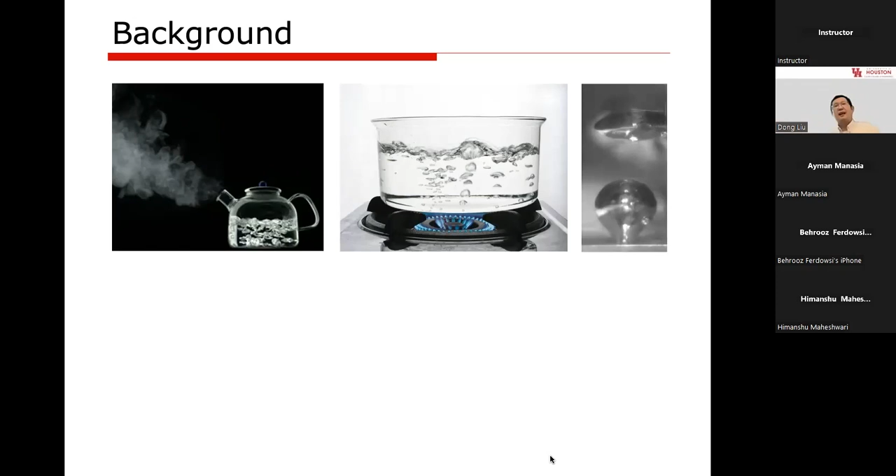So now, why do we study this? Boiling is good - specifically here I talk about so-called nucleate boiling, or nucleate pool boiling. This is when you have a pool of liquid at rest, so there's no flow in the liquid. Nucleate boiling occurs in such a scenario.

Now, if you have ever taken an undergrad heat transfer class, there are 3 modes of heat transfer: conduction, convection, radiation. Phase change is a different type, and in fact, depending on the context, nucleate boiling can be one of the more efficient heat transfer modes - even better than the other modes I mentioned.

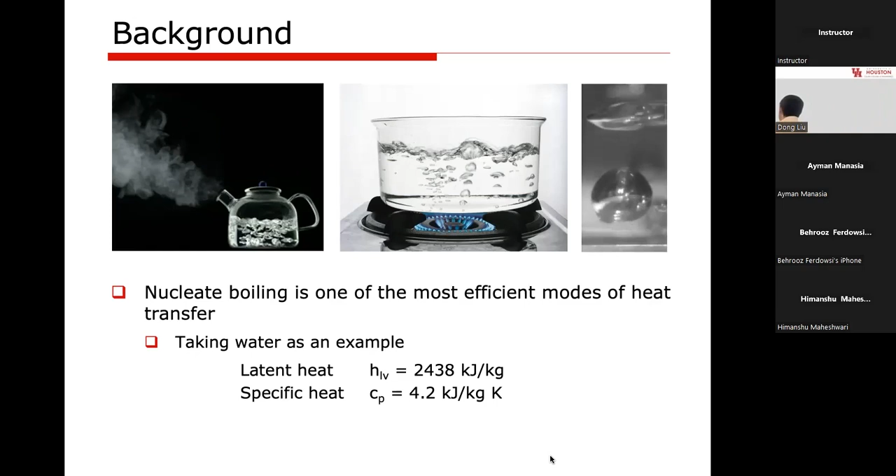So why? To give you a simple example, let's look at water. Water has two very important properties. One is its specific latent heat, which is 2,438 kilojoules per kilogram. This means in order to boil 1 kilogram of water, it can absorb this amount of energy - 2,438 kilojoules per kilogram.

Now, if you keep water as a liquid and only rely on the so-called specific heat to absorb energy, the CP is 4.2 kilojoules per kilogram per Kelvin. That means if you have 1 kilogram of water and you raise its temperature by 1 degree or 1 Kelvin, it can only absorb 4.2 kilojoules.

So now you see there's a big difference between using sensible heat versus latent heat. From this calculation, let's say we want to dissipate or absorb the same amount of heat with the same amount of liquid or water. If you rely on the boiling process, this is the amount of energy you can dissipate. Now this is the amount of energy you can dissipate by using specific sensible heat.

Now from fundamental thermodynamics, we know phase change can occur at constant pressure and constant temperature, meaning at 1 atmospheric pressure the boiling point will be 100 degrees for water. So while maintaining that temperature, you can dissipate this amount of energy. Now if you want to do the same using sensible heat, the water temperature rise must be as large as 600 degrees in order to do the same.

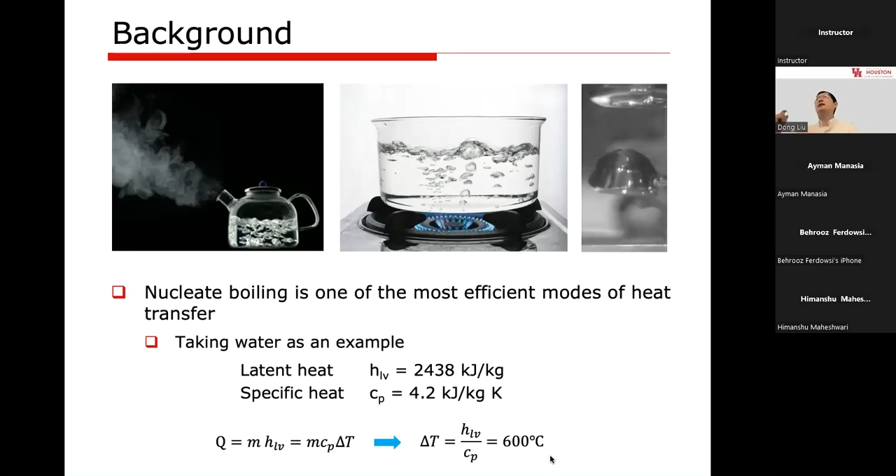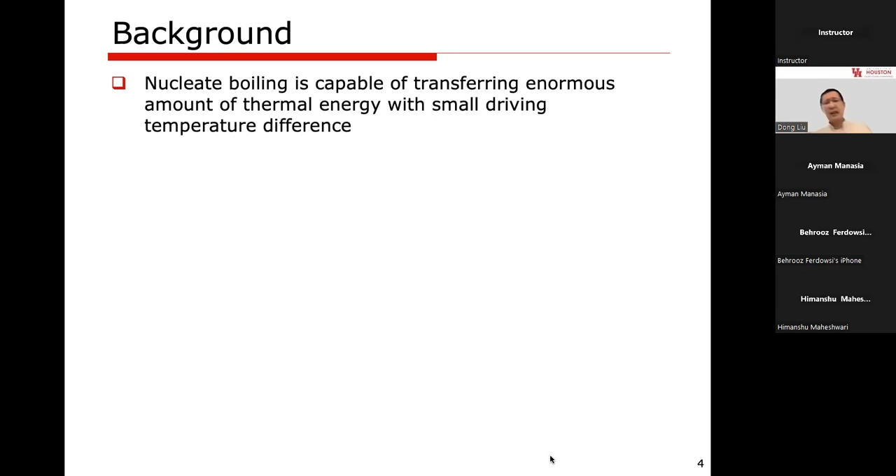So from this you can tell nucleate boiling is appealing, especially because it is capable of transferring enormous amounts of thermal energy with a very small driving temperature difference. Ideally there's no temperature rise at all. So if you maintain the process at 100 Celsius at 1 atmospheric pressure, you can transfer a lot of energy. That is why it has been heavily used in industry.

You see the first picture is actually the original design of Watt's steam engine, which basically powered modern civilization. Then people are still using boiling in the nuclear power plant.

So move on to a newer technology: this is desalination for seawater. We rely on the boiling process to convert the salty seawater into clean water. Now, if you go to a data center nowadays, you can see people are using so-called immersion cooling to make sure the servers are operating below a certain temperature limit.

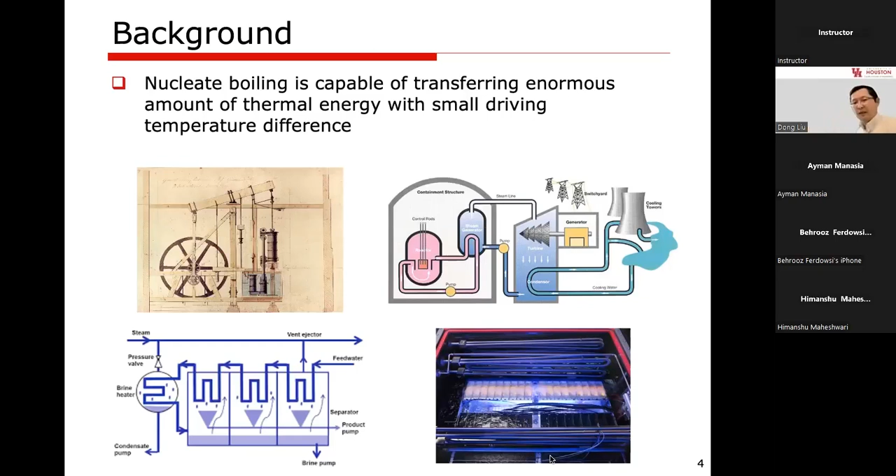Okay, so these are the application backgrounds of boiling. Now, ideally speaking, what kind of boiling performance do we have? We can see that from the so-called boiling curve. Basically, it is a graph constructed using wall heat flux, which is watts per unit area, as the vertical axis, and the wall superheat.

Obviously, the ideal case would be once boiling occurs, we want to basically pay nothing. So once boiling occurs, we want the wall temperature to maintain at a constant value. Even when you further increase the heat flux, the wall temperature doesn't increase. So basically, as far as there's water, the temperature always maintains, let's say at 100 Celsius at 1 atmospheric pressure.

So this is the ideal case. From a performance point of view, for this ideal scenario, nucleate boiling can occur at a very low wall temperature. This curve represents the liquid water, so in order to gradually increase the heat flux, the wall temperature must increase. But not for consumer electronics - the temperature of the chip cannot exceed 85 Celsius, so going beyond that temperature will cause damage to your device, for example your cell phone.

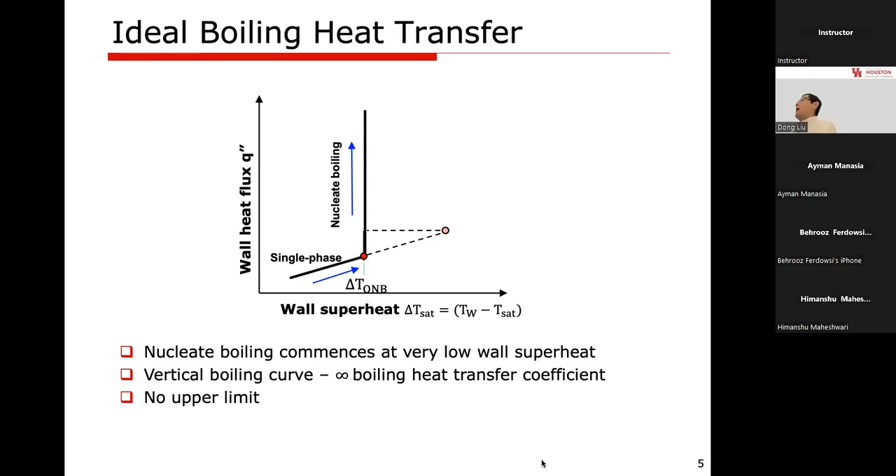Now, when the heat flux reaches a certain value, you start to see the first formation of bubbles. That is also called ONB, onset of nucleate boiling. Keep on increasing the heat flux will cause the operation point to move along this curve. So it's not vertical—here you see the first formation of bubbles.

Further increasing heat flux causes more and more bubbles to form at the surface of the device. Now it has an upper limit—we call this heat flux the critical heat flux. This is where basically the entire surface is packed with bubbles. Further increasing the heat flux means more vapor will be generated, so you can imagine those bubbles will start to interact with each other—they will agglomerate and form bigger bubbles.

Once you exceed the critical heat flux, something very bad will happen. Let me show you the video. At that point, the entire surface will be covered basically by a layer of continuous vapor film—you no longer have discrete bubbles. The surface is under constant cover of vapor. We know vapor has very low thermal conductivity, so basically you are insulating the heating surface from the cooling liquid. The result is the temperature of your solid surface will increase dramatically.

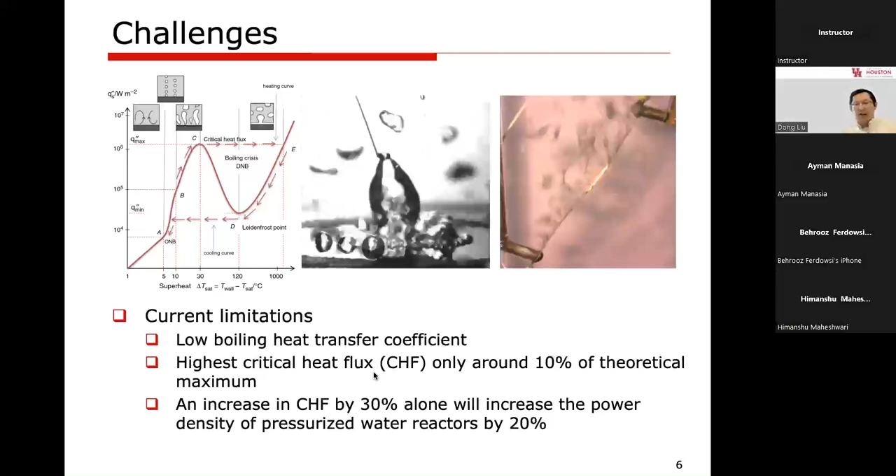Next, to enhance boiling, there are many different things you can do. For our research, we picked on surface wettability because it is an important factor that plays into almost all aspects of boiling, including onset of nucleate boiling—this is the start of boiling—then the nucleate boiling heat transfer, during the midpoint or mid-process of boiling, and it also affects the critical heat flux, which is the upper limit of boiling.

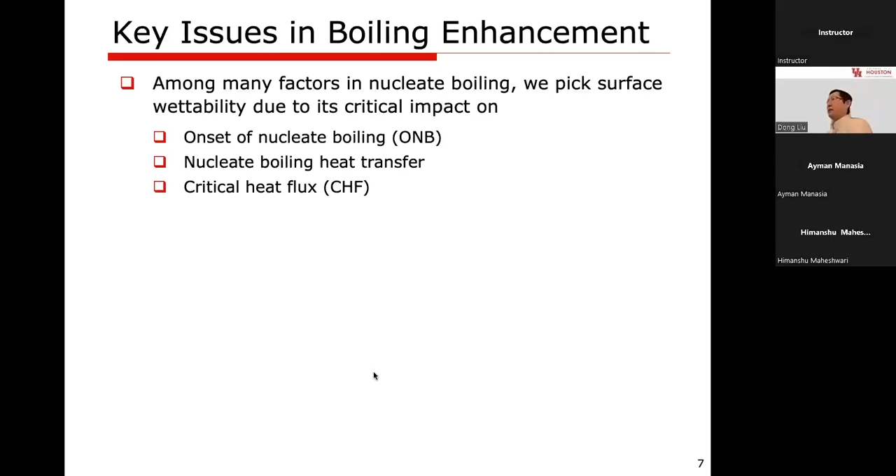Now, what is surface wettability? It is a measure of how well the liquid can wet the surface. It is usually represented by the so-called contact angle. Here I have a flat surface deposited by a liquid droplet—the contact angle is measured through the liquid side of the liquid-vapor or liquid-gas interface.

Now, the same picture can actually be found in a boiling system. Here I have a vapor bubble—following the same definition, this side is the liquid side, so the contact angle is measured like this.

Basically, when the contact angle is less than 90 degrees, we call the surface hydrophilic—that means it can be wetted relatively easily by the liquid. Otherwise, we call the surface hydrophobic. Specifically, in micro-nanotechnology, if the contact angle becomes less than 5 to 10 degrees, you call the surface super hydrophilic. Now if the contact angle gets greater than 150 degrees, you call it super hydrophobic.

Now the question is, we have the choice of using either a hydrophobic or hydrophilic surface to impact boiling, but which one is better, or which one is good? Do you want the surface to be wetting or non-wetting? You guys can think about it.

And next, I give you some of the results people found from the literature.

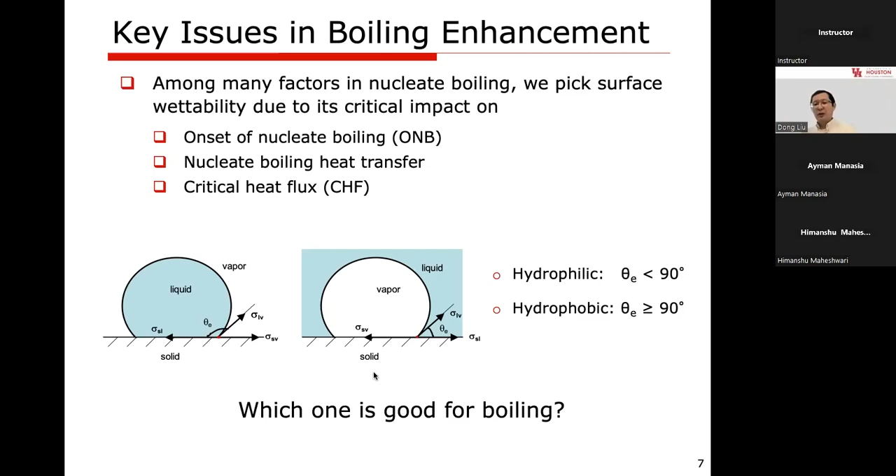Okay, so now let's start from onset of nucleate boiling. For bubbles to form, there's an energy barrier that must be overcome for the nucleation process to take place. This energy barrier can be calculated as follows. Here, theta E is the contact angle, which represents the wettability of the surface. Sigma is the interfacial tension, and Re is basically the size of the so-called nucleation site.

So I can plot this F factor as a function of contact angle. For a very hydrophilic surface, the F factor is big, as big as unity. Now, as far as the contact angle exceeds 150 degrees, this F factor almost approaches 0. That means you have a zero energy barrier—basically there's no energy barrier for the nucleation to occur. So that also means the nucleation process becomes spontaneous.

So that's why when you read papers, there's a term called nanobubble formation on nanostructured surfaces at room temperature and room pressure condition. So there's no heating—why do you have bubbles? The reason is exactly like this: there's no energy barrier, so the bubbles can form spontaneously.

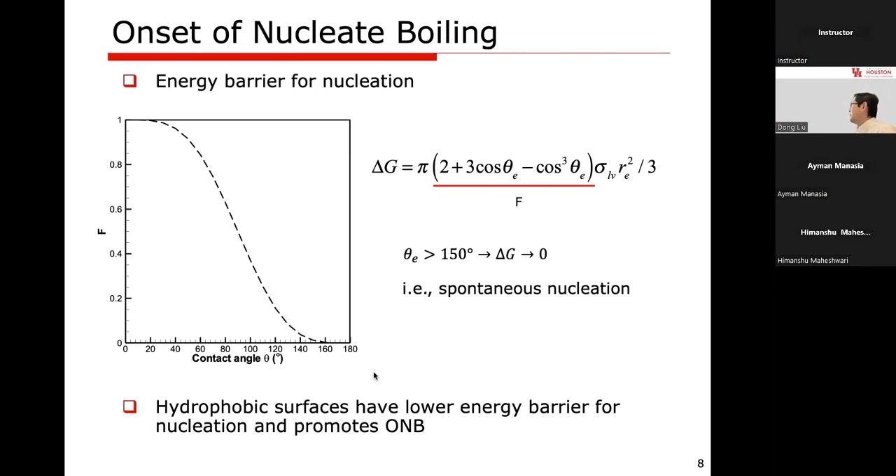From this point of view, you can see a hydrophobic surface, because it has a lower energy barrier for nucleation, is better to promote onset of nucleate boiling. Now, we care very much about nucleate boiling heat transfer, because that's what we rely on to harvest energy, to dissipate energy. So the high boiling heat transfer coefficient depends on many factors, for instance the nucleation site density, bubble departure size/frequency, the contact line motion, et cetera.

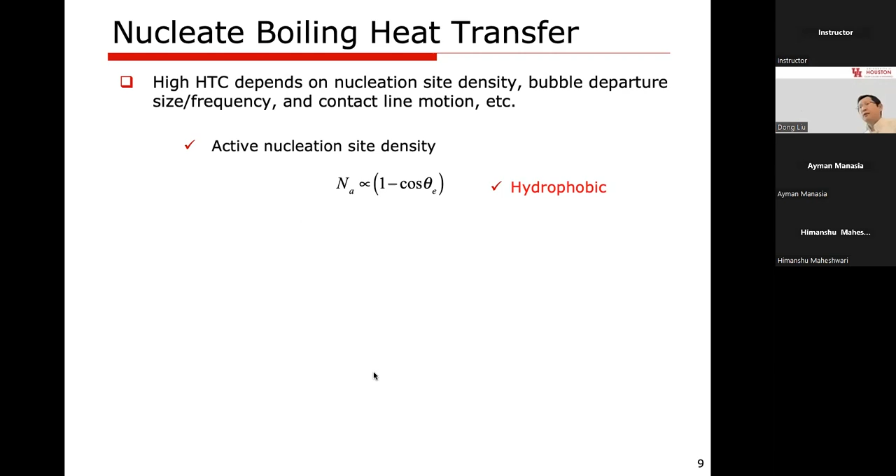Specifically, if you look at how many nucleation sites you could have per unit area, it can be described by this equation. Basically, you can see if the surface is hydrophobic, you have an obtuse contact angle, so this factor will become greater than unity. That means a super hydrophobic surface is favorable for having a larger active nucleation site density.

Now, the other parameter is the nucleation rate—that is, per unit time and per unit volume, how many boiling nucleation events you could have. Obviously, the bigger this J factor is, the more bubbles you're likely to see. This equation is very complicated, but if you examine the impact of contact angle theta and the F factor we saw before, the conclusion is hydrophobic surface is better—it will give you a higher nucleation rate.

Now, the other factor is the so-called bubble departure. Having more bubbles is not necessarily good, because once the bubbles are there, they will block the direct contact between the liquid and solid surface. So you want the bubble to form easily and leave the surface as soon as possible—that's why bubble departure comes into play.

So there are two factors for bubble departure. One is the departure size, which is proportional to the contact angle—basically, on a hydrophilic surface you have small bubbles, and on a hydrophobic surface you have a big bubble. Now, the key factor is the departure frequency, because the product of the departure frequency and departure size is a constant. That means a bigger departure size will give you a smaller departure frequency, and vice versa.

That means if you have a hydrophilic surface, you have a smaller departure size d, but you would have a bigger departure frequency f, so the bubbles can form and leave the surface more rapidly—that is good for boiling. Now, when it comes to critical heat flux, hydrophilic surface will win out, because when the surface becomes hydrophilic, it will constrain the motion of the contact line at the surface, since the liquid likes to stay in place. That confines the expansion of the footprint of the bubble, so it's less likely for the bubbles to agglomerate and form a vapor film.

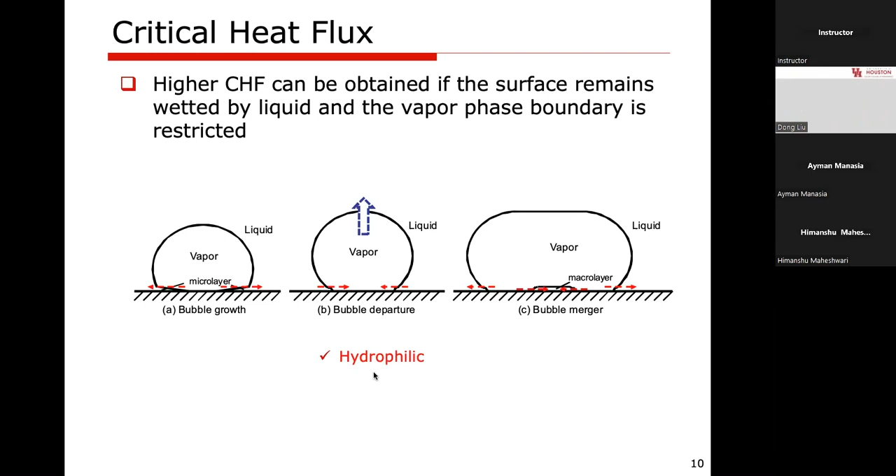Can the surface also affect the nucleation site density? Here you're talking about the hydrophobic and hydrophilic contact angle, but what about the surface roughness?

Yes, the nucleation site density depends on whether you have a perfectly smooth surface—there's basically nowhere for the bubble to form. So if you have some imperfection in the surface, that will also contribute and give you more nucleation impact. Now, wettability and surface roughness are intricately connected, so yeah, they will affect each other.

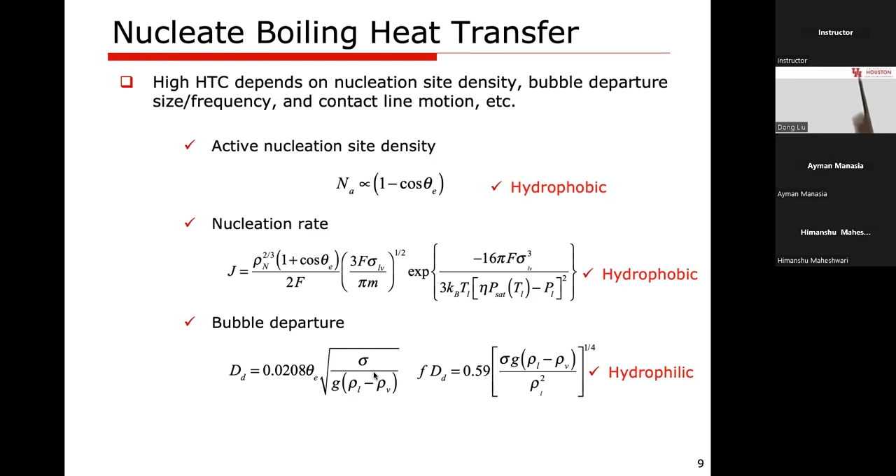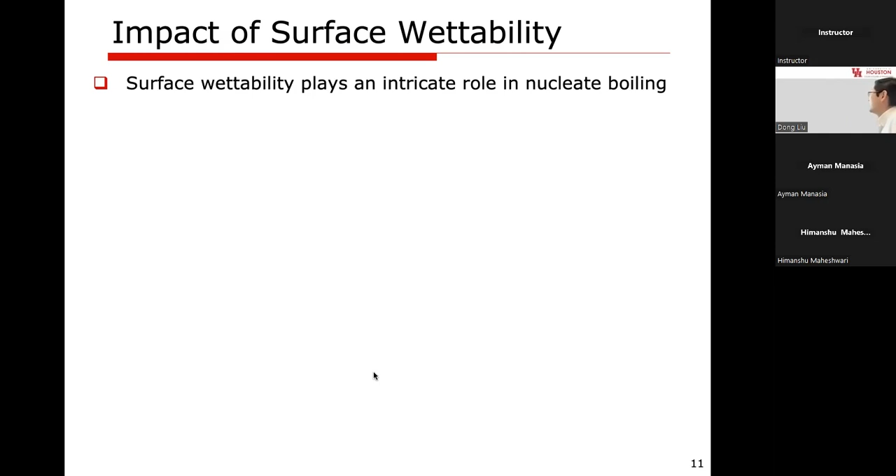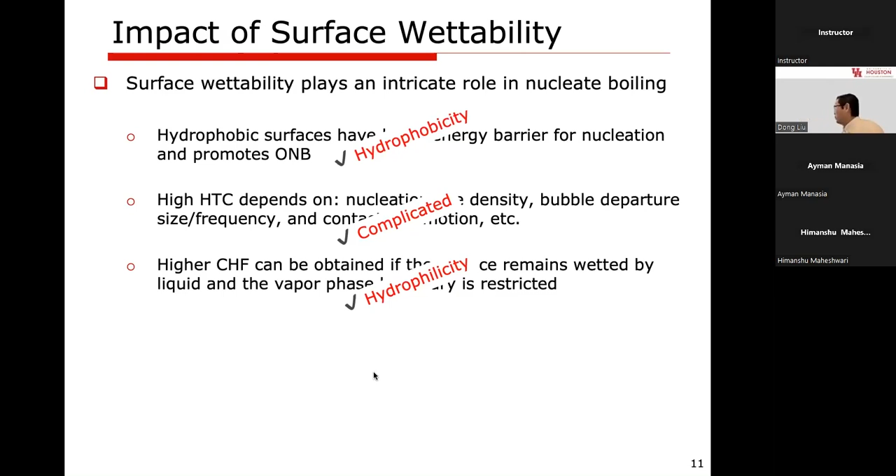Overall, we can examine the impact of surface wettability, which plays an intricate role in nucleate boiling. There are three factors: the onset of nucleate boiling (ONB), the end of nucleate boiling, CHF, and in between, which concerns performance. Hydrophobicity helps ONB, and hydrophilicity helps increase CHF. Now the heat transfer in the middle is a more complex problem, so the contribution due to surface wettability can go one way or the other. At the end, we are left with a dilemma: hydrophobicity promotes ONB, but hydrophilicity enhances CHF. But a surface cannot be both hydrophobic and hydrophilic, so you have some conflict of interest here.

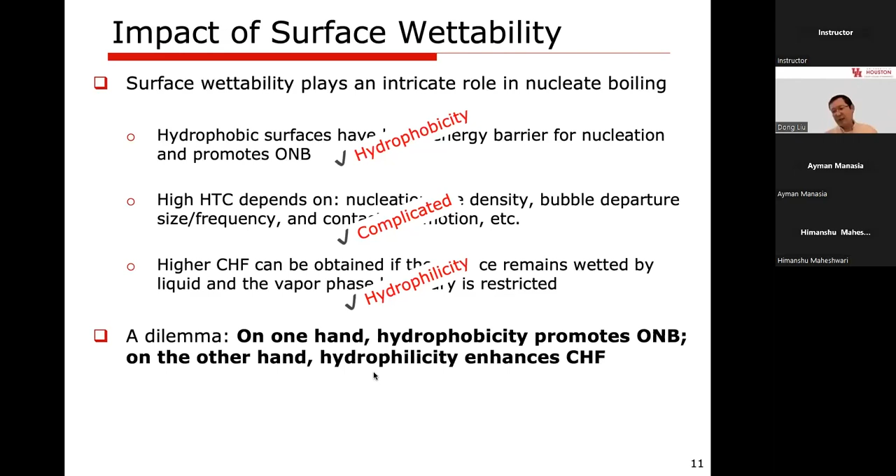Some experimental results can further illustrate this. The blue dots represent data for a hydrophobic surface. This is a boiling curve, heat flux versus wall superheat. You can see that ONB occurs very fast, at wall superheat of about 4 degrees Kelvin you have the commencement of boiling. And the CHF is very low, below about 250 kilowatts per meter square.

Now if you switch to a hydrophilic surface, it takes a lot more wall superheat, like 15 Kelvin for boiling to initiate, but it has a much higher CHF, as high as about 800 kilowatts per meter square. You see the big difference.

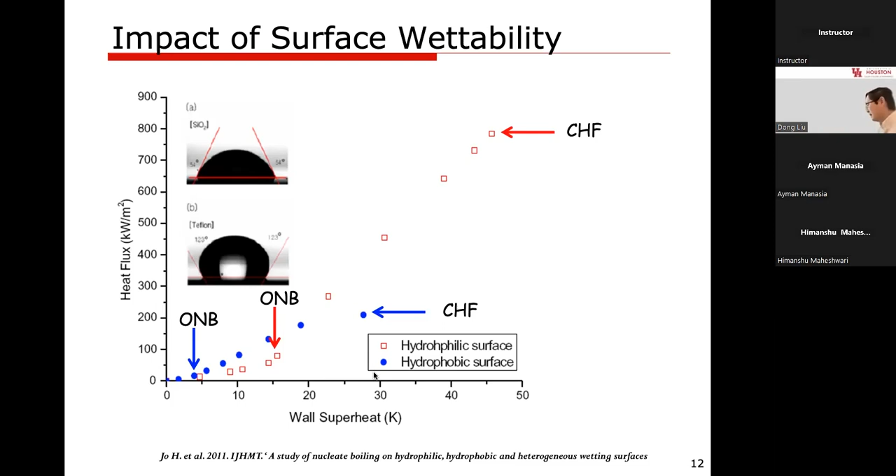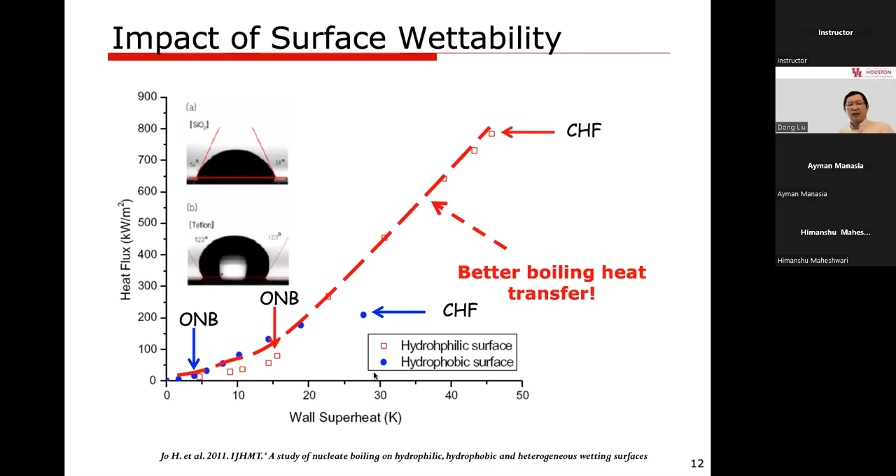So looking at this, it is very natural to ask: can we graft the performance of both surfaces? At a low heat flux condition, we want to utilize the performance from the hydrophobic surface, and at a high heat flux, we want to utilize the performance of the hydrophilic surface. Can we do that? You guys can think about whether that's doable. In fact, people are doing that.

We can structure the surface either chemically or structurally to introduce a hydrophobic section and a hydrophilic section. Chemically, you can make the background hydrophobic or hydrophilic, and coat small dots or small spots with hydrophobic material, so that nucleation can occur on these hydrophobic islands, and the large hydrophilic background can ensure you have good CHF performance.

Similarly, you can use so-called hierarchical micro-nano structures, with a microscale structure and a nanoscale structure. The idea is that the microscale structure can serve as nucleation sites, whereas the capillary wicking in the nanostructure can help make the surface very wet, so that you can enhance CHF. This is a very natural thought.

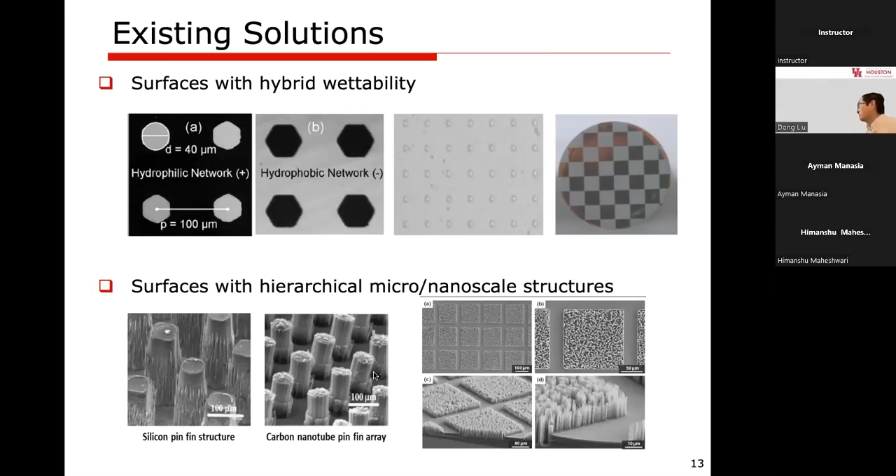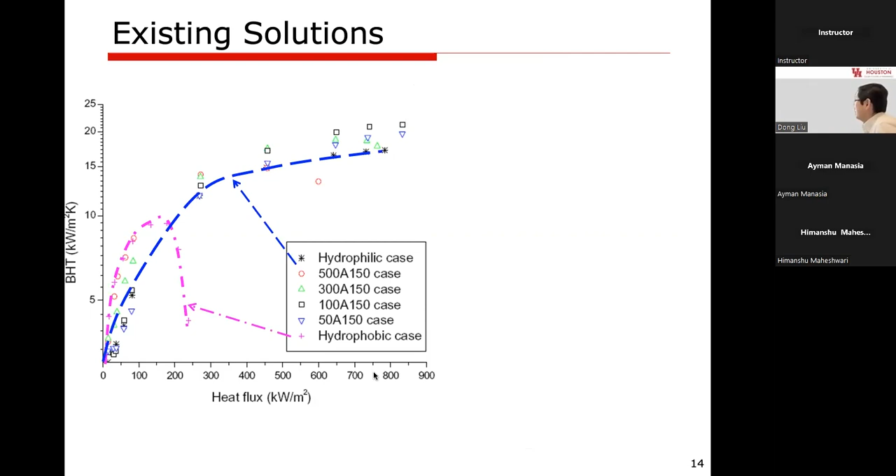Now does the idea work? Actually it works, let me show you some examples. When you have a hydrophobic surface, this is the performance curve. When you have a hydrophilic surface, this is the performance. Now what if we have the hybrid surface? This red curve represents the hybrid surface. At lower heat flux, you have performance very close to the hydrophobic surface, whereas at very high heat flux, the performance is even better than the pure hydrophilic surface.

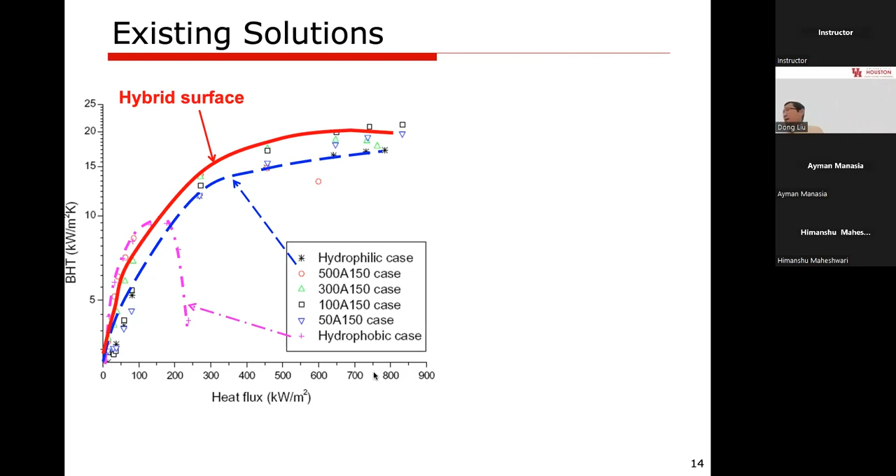So it works, but there are some very important deficiencies, drawbacks. For instance, those are micro-nano fabricated surfaces, the design and fabrication can be very complex and costly, not cost effective. And also they are very difficult to optimize, unless you have a very clear understanding of the boiling process, otherwise you don't know what parameter to optimize, since there are so many parameters to work with. And also, over time, the micro-nano structures will age - fouling and contamination will easily damage the purpose of these structures.

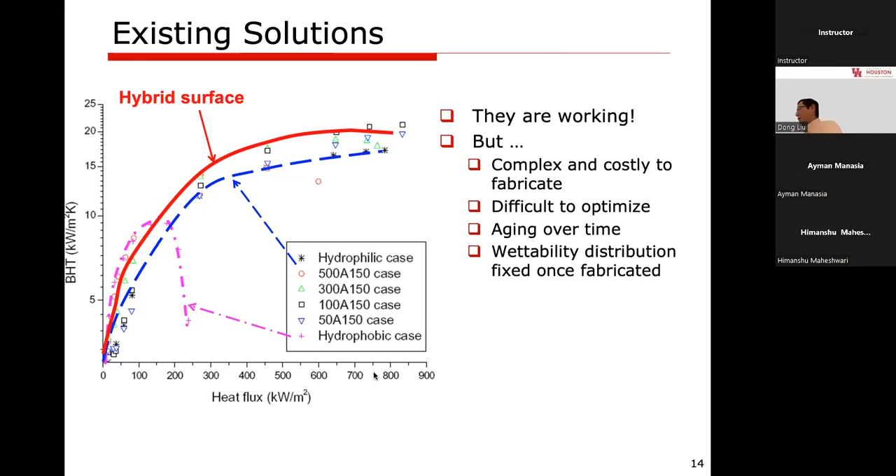More importantly, the boiling process is actually a dynamic process. For example, today is fairly warm, but yesterday it was fairly cold. Thinking about this from a power plant point of view, their thermal load will fluctuate, so the heat flux you need to deal with may be in the low range, moderate range, or high range. Once these structures are made, they either work better for the low heat flux scenario or the high heat flux scenario - you cannot dynamically tune that. So the question we are trying to ask ourselves is: can we actively control the spatial-temporally dynamic boiling process?

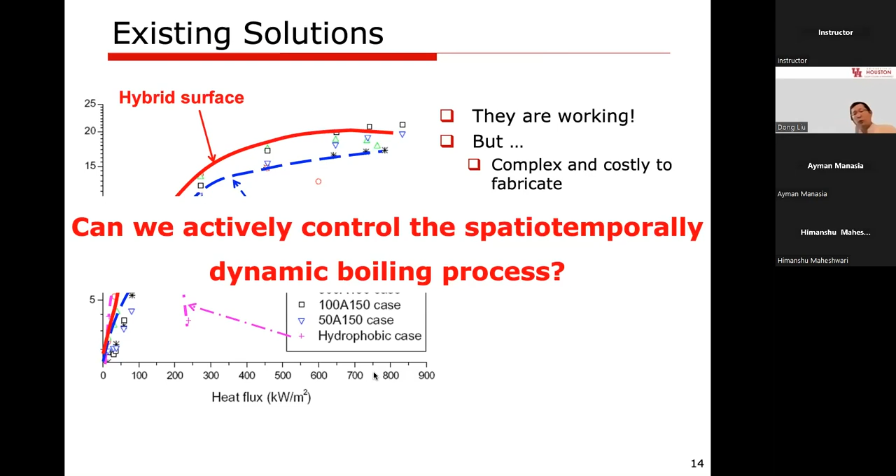Can you change the surface wettability in the time domain rather than in the space domain? That's the question we want to answer. Our solution is, well, yes, we can.

We want to use so-called electrowetting to dynamically tune the surface wettability. The idea is to apply an external electric field to change the surface wettability. Here I show you a device that will allow us to do this.

For example, we have a silicon substrate, and the yellow bar represents the electrode. This light gray area material is dielectric material, which ensures the liquid is not directly connected to the metal electrode. On top we have a layer of Teflon, which makes the surface hydrophobic before you apply the electric field.

So how does it work? Here I have a droplet that is deposited onto this Teflon-coated electrowetting device. Before we apply the electric field, if you measure the contact angle, it is maybe 110 or 120, because the surface is hydrophobic.

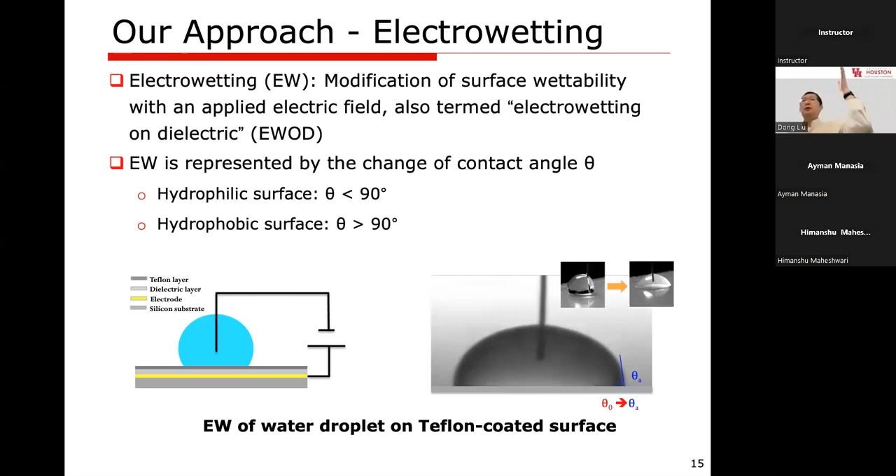Now, once you apply the field, you see the contact line moves out and the droplet relaxes. If you now measure the contact angle, it's reduced to maybe 80, 85 degrees. So it crosses the boundary between a hydrophobic surface and a hydrophilic surface.

So why does electrowetting occur? There are different theories. One perspective is that because of the application of the electric field, the surface free energy changes. Nature prefers a minimum energy state, so when you apply the field, the droplet must spread out to cover the more energetic solid surface.

There's also a mechanistic perspective: when you apply the field, there is an electrowetting force acting on the contact line, which is the edge of the drop, and that forces the drop to spread out.

Regardless, the overall effect of electrowetting can be described by this guy, Gabriel Lippmann, back in 1875. The equation is also called the Young-Lippmann equation. By the way, Lippmann won the Nobel Prize in 1908 for something related to photography, not for electrowetting.

The equation tells you that theta zero is the so-called inherent contact angle, fixed once you pick the liquid and the solid material. In the second term, V is the applied electric potential, D is the thickness of the dielectric layer, and sigma is the interfacial tension. After you apply the field, the contact angle changes from theta zero to theta A.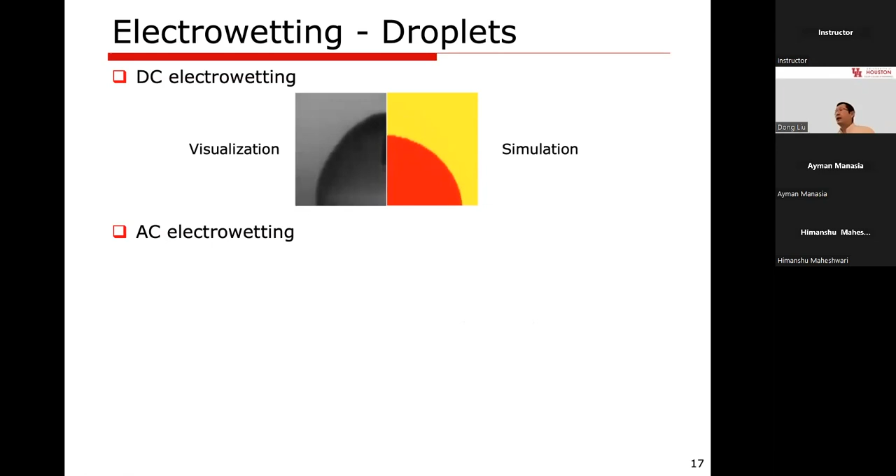Another very interesting phenomenon is that we can use an AC field to generate and control electrowetting. Here you can keep the root mean square value of the voltage constant and vary the frequency. Let me show you two videos: this is at 32 volts, with a driving frequency of 28 hertz.

Now, when you increase the frequency, the interfacial oscillation becomes very different. If you keep increasing the frequency, you could get more than P2 mode—P4 mode, P6 mode, and so on, many modes. This means we can indeed change the contact angle using DC or AC electrowetting effects.

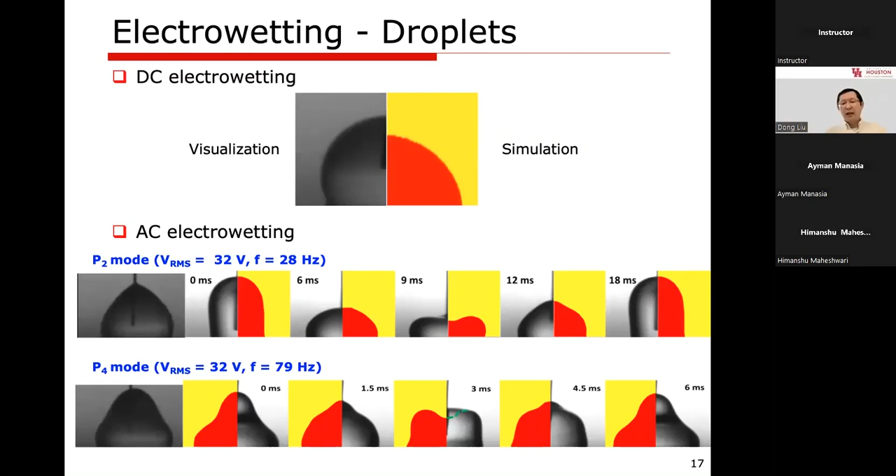Now the problem is most of the results available in the literature have been obtained by playing with droplets, but that's not the focus of our work. It's the same liquid vapor interface, but we are concerned with bubbles. So the effect works for droplets, but it may not work for bubbles. We did some study to see if it works.

Luckily we found some paper, this is before we started the project. A paper said you can use the same electrowetting to reduce the contact angle associated with the bubble, reducing it from 120 all the way down to 73 degrees. It's not a lot, but it is significant, because that means even for a bubble, you can cross the hydrophobic to hydrophilic threshold.

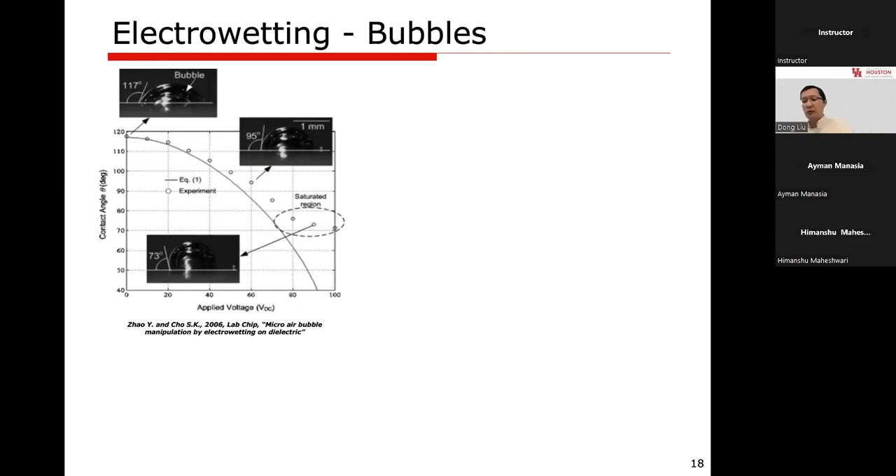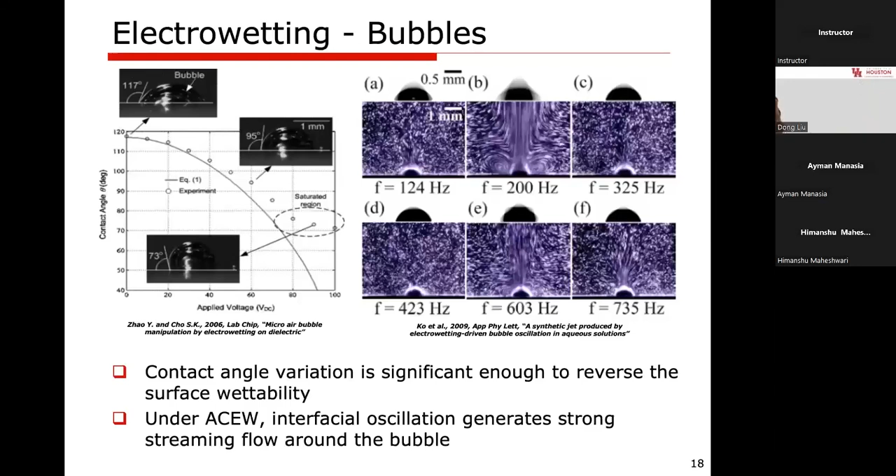More interestingly, we found another paper which utilizes AC electrowetting to modulate the bubble. The bubble motion is not clear, but the so-called streaming flow at a specific driving frequency becomes very obvious. This is also important for boiling, because if the bubble can act as a pump, it generates flow around it, meaning better mixing between the hot fluid near the wall and the cold fluid far away, which helps further increase boiling heat transfer.

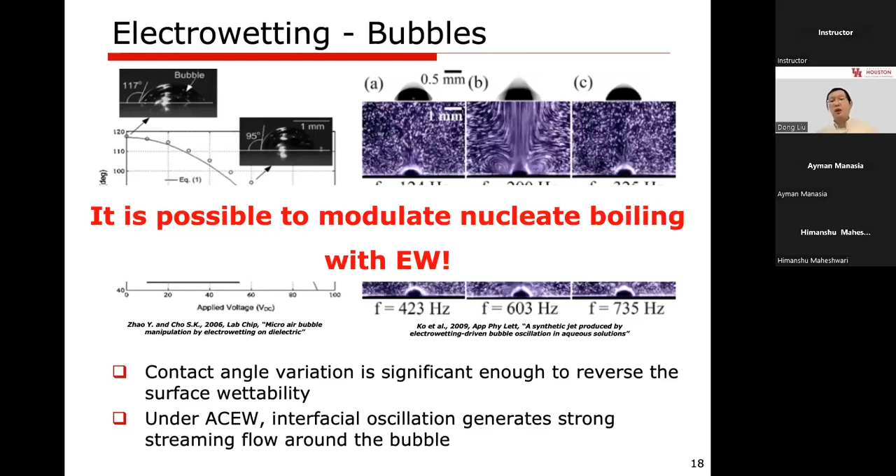With this, we decided indeed we can modulate or enhance boiling with electrowetting. Even before we do the heat transfer study, we look at the AC effect on bubbles, no longer droplets. You see, at a root mean square voltage of 53 volts at 10 hertz, this is what you see for a bubble at room temperature.

Because this frequency is very, very slow, you can actually see in real time how the bubble responds to the electric field. The contact line is moving, it's like the bubble is shaking. Now we increase the liquid temperature to 100 Celsius at atmospheric pressure, because this is what we actually need for boiling application. Basically similar behavior.

Now when you further increase the frequency to 100 hertz, you start to see the oscillation of the interface. Imagine there will be flow generated around the bubble, so that serves as some sort of agitation to the fluid, which is good for heat transfer.

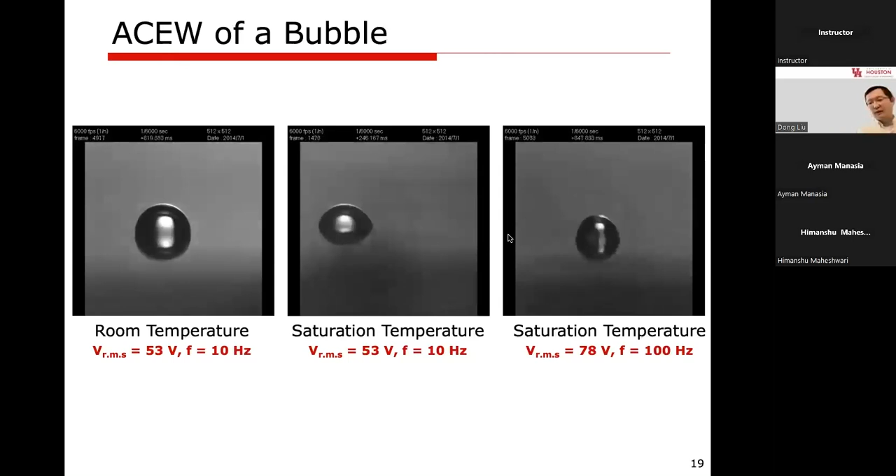Okay, so now we need to examine if indeed the idea works. For that purpose, we constructed this experimental apparatus. We have a boiling chamber made of aluminum. Inside, the key part is the electrowetting piece, made of a 3-inch silicon wafer. I will not go through all the details, but we use silicon itself as the electrode, because it's very conductive, to generate the electrowetting signal.

Also at the backside, we deposit the chromium thin film heater, because boiling you need the power input, and that is coming from the heater. Now for the measurement, we have two circuits: one to control the signal for electrowetting, and the other one to power the heater.

For measurement, we have a high-speed camera to monitor the bubble dynamics, because we want to see how the bubble motion will be affected by electrowetting. And also we have a high-speed infrared camera, because we are concerned with temperature.

We want to dissipate, let's say, 500 watts, but how does the temperature change? We do not want the temperature to be so high that the silicon wafer be damaged. By the way, when we exceed that limit, we actually observe the cracking of the silicon wafer. It was a mess.

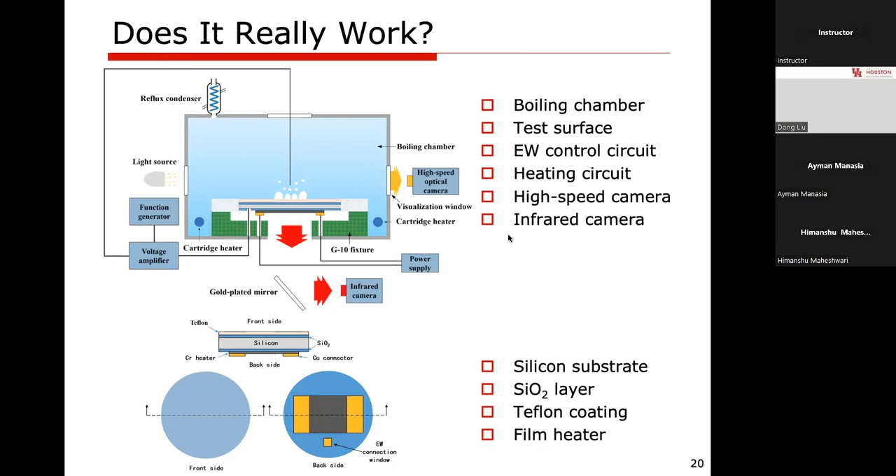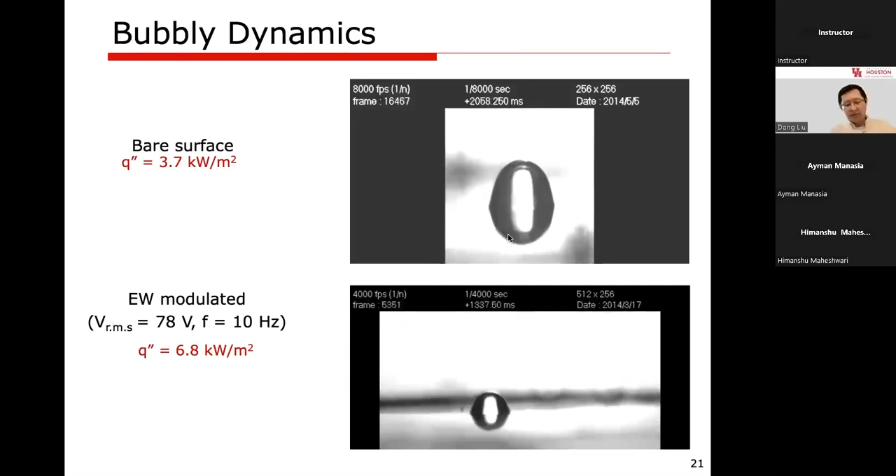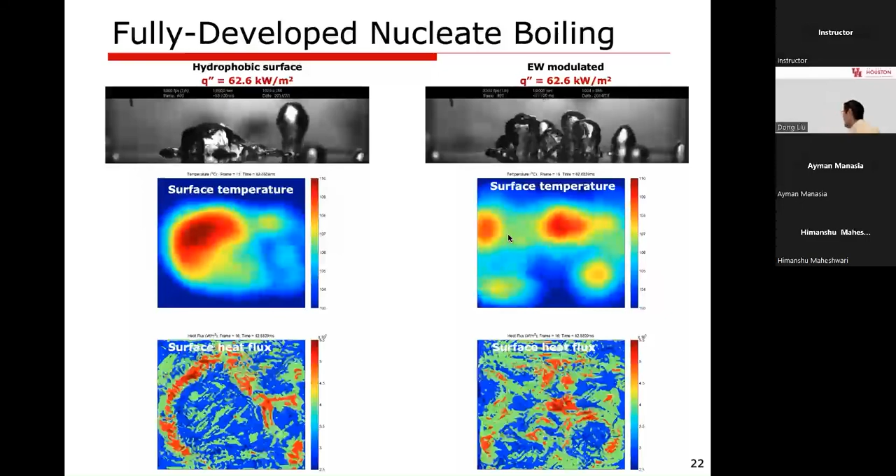Now with electrowetting, at the same condition, you no longer have a big bubble hovering over the surface. Instead, you start to see the reappearance of individual bubbles. So there's no more big hotspot - instead you have smaller, separate hotspots. That's good for heat transfer, and overall the heat flux of the surface is enhanced.

Now, what's more significant occurs at the critical heat flux. This time, the heat flux is increased to 82 kilowatts per meter square. Let's see what's going on. You see now very clearly the surface is covered by a vapor film, and the big hotspot has a highest temperature of about 155 Celsius.

At some point we will trigger the electrical signal. Now you see this time the film breaks down into individual bubbles, and the big hotspot breaks down into much smaller pieces, and the maximum temperature reduces from 155 to 114, 112.

So if you look at this again, this is film boiling - the entire surface is covered by film, and the maximum temperature is very high. Then the vapor film disappears and you see the individual bubbles.

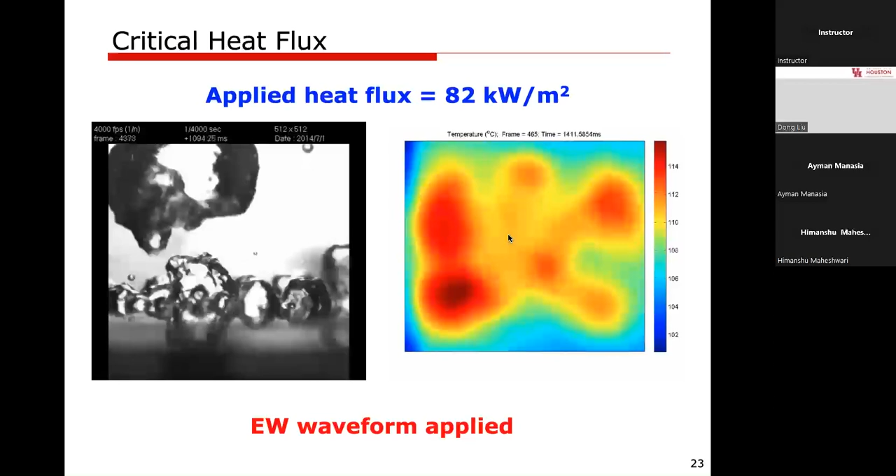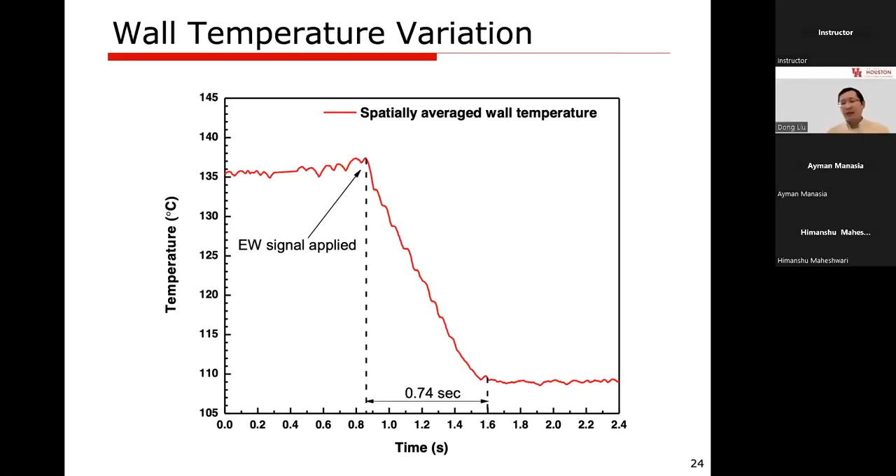Now the amazing thing is how quickly this can happen. Basically, once you click the button, within a fraction of a second - 0.74 seconds - you can change the temperature by so much. That illustrates how effective the electrowetting effect is in terms of enhancing boiling.

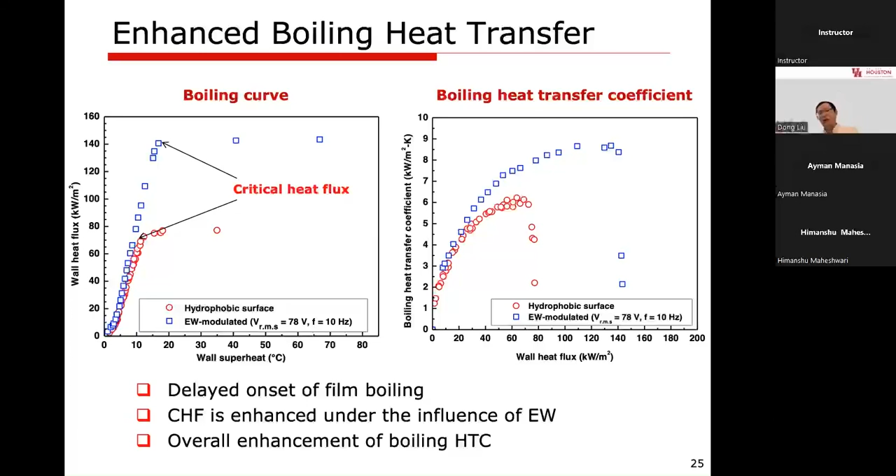So now the next question we need to ask is why. We know it happens, but why does it happen? For the nucleate boiling regime, we have a more obvious answer, because there's an electrowetting force acting at the contact of the bubble, so the bubble dynamics will be affected.

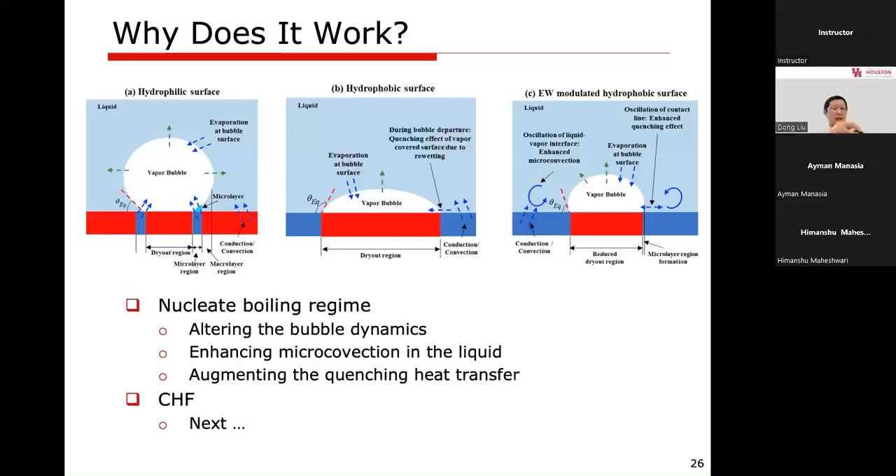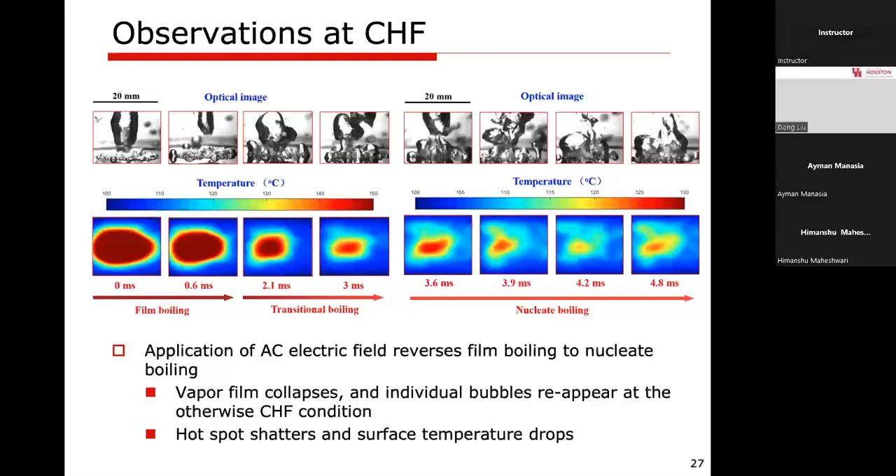Now behind that, we need to understand what actually contributes to CHF. So there are two.

Well, I will go very quickly here. There are two sets of theories. The first set is the so-called far field perspective, which attributes CHF to what happens at some distance from the surface.

So when the vapor leaves the surface in the form of a vapor column, if the heat flux is very high, the generation of vapor becomes so violent that the interface of the vapor column becomes unstable. The hydrodynamic instability causes the vapor column to collapse, so you end up with a big bubble, the so-called mushroom bubble, hovering over the surface. That blocks the colder liquid from touching the surface. This is the far field theory.

There's also the so-called near field theory, which attributes CHF to what happens near the surface. It acknowledges the formation of the giant mushroom bubble, but says the bubble is connected to a thin layer of liquid at the surface. The bubble can grow because the thin liquid film continues to feed vapor to the bigger bubble. The dry out, or CHF, occurs when this liquid film completely disappears. So you have two different types of perspectives.

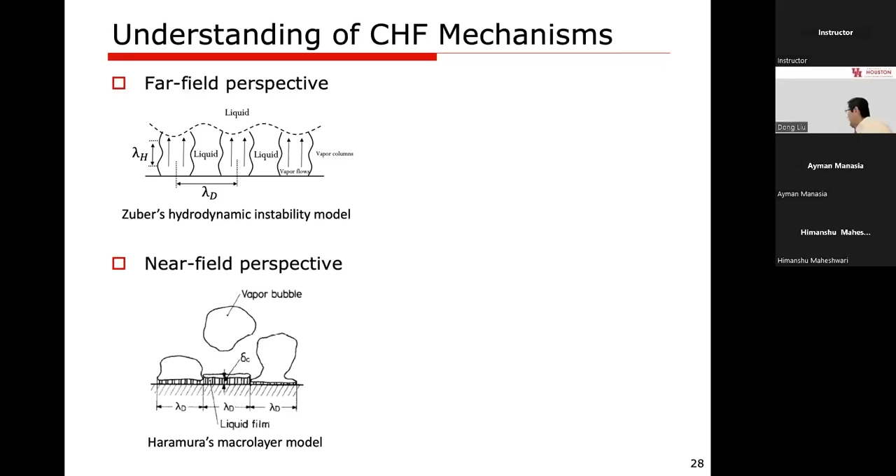Later there's the unified theory, which connects the far field to the near field theory. The idea is we look at the force balance on the bubble. The forces include the hydrostatic force and the surface tension force at the contact, which tend to hold the bubble in place and prevent it from expanding.

There's also the so-called recoil force. Because liquid molecules leave the liquid phase and are ejected into the vapor, it's like when you shoot a bullet and feel the recoil force. This is exactly what happens: when vapor molecules enter the bubble, they push the liquid-vapor interface backward.

When the recoil force overcomes the surface tension and hydrostatic force, the footprint of the bubble will expand, so it has a higher chance to agglomerate with bubbles nearby. This is a fundamental reason for CHF to occur. In this unified theory, it considers the bubble dimensions, like diameter and height, relative to the hydrodynamic instability, but attributes the expansion of the bubble to the contact angle. So it's far field and near field effects together.

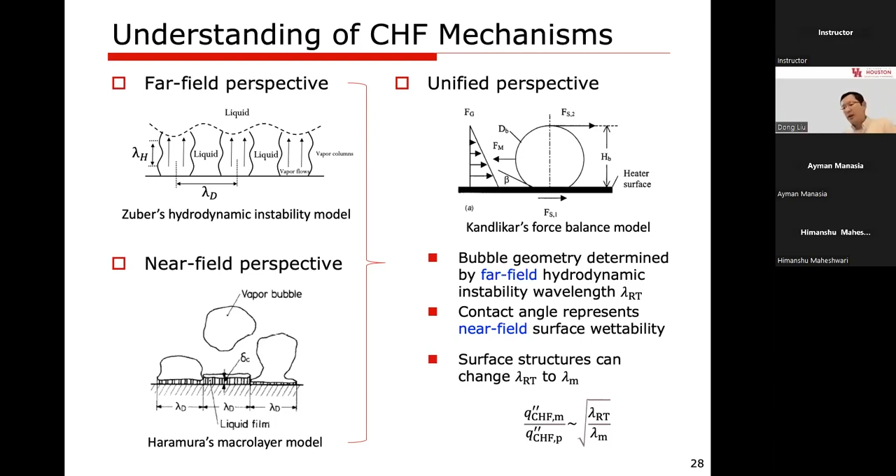By using this theory as the framework, we were able to show that with an electric field, we can change or reduce the contact angle, therefore enhancing the near field effect. Also, with an electric field, we can reduce the wavelength of the hydrodynamic instability. Further, because of the electric field, we can generate an additional electric force on the entire surface of the bubble that pushes the bubble inward, in a way counteracting the recoil force. With all this, we can improve surface wetting, amplify interfacial instability, and induce interfacial stresses, leading to CHF enhancement.

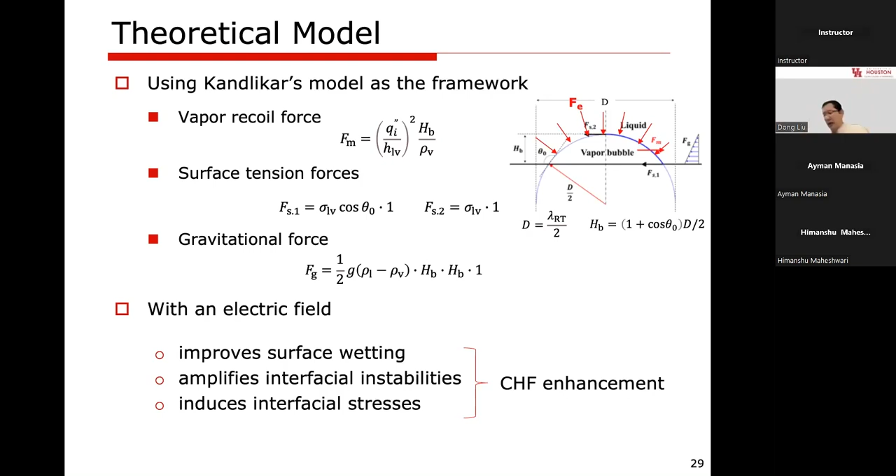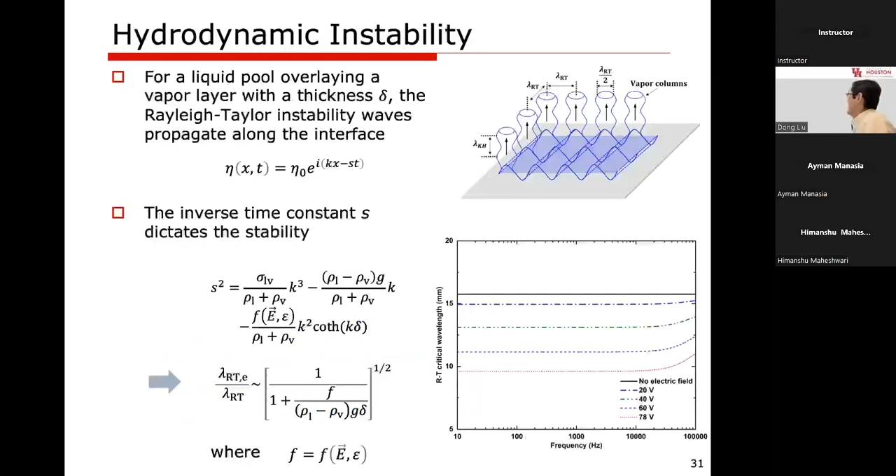I will skip through the next three slides, each detailing the three impacts I mentioned: the hydrodynamic instability, and the electric force. At the end, we compare the model prediction with the experiments and see very good agreement, so our model does capture the important physics.

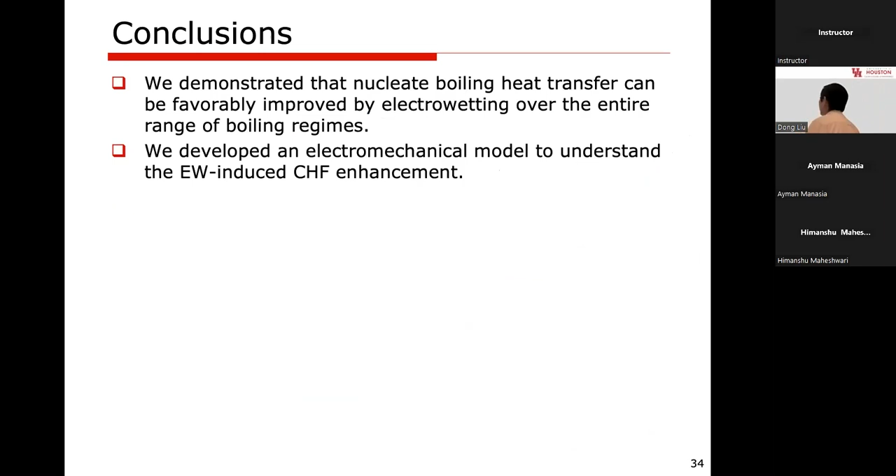To summarize, we demonstrated that nucleate boiling heat transfer can be enhanced by electrowetting, and we developed an electromechanical model to understand the electrowetting-induced CHF enhancement. This is basically all I want to talk about.